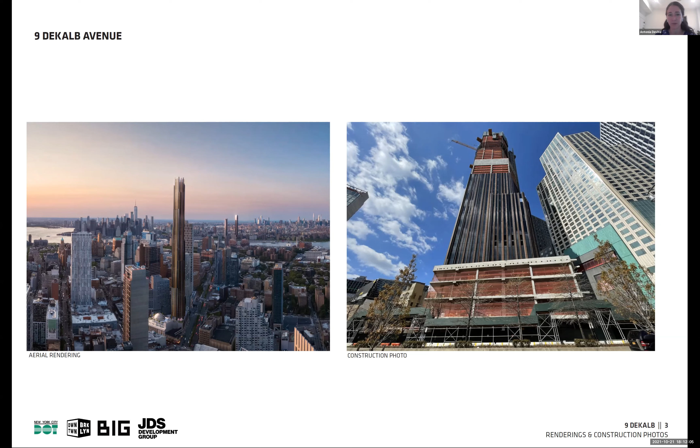And of course, I personally am equally thrilled that we are adjacent to the other Brooklyn landmark, the Junior's Cheesecake Factory. We pay particular attention with all of our projects to the ground plane, and we really admire the work that Downtown Brooklyn Partnership and Bjarke Ingels Group are doing to enhance the streetscape.

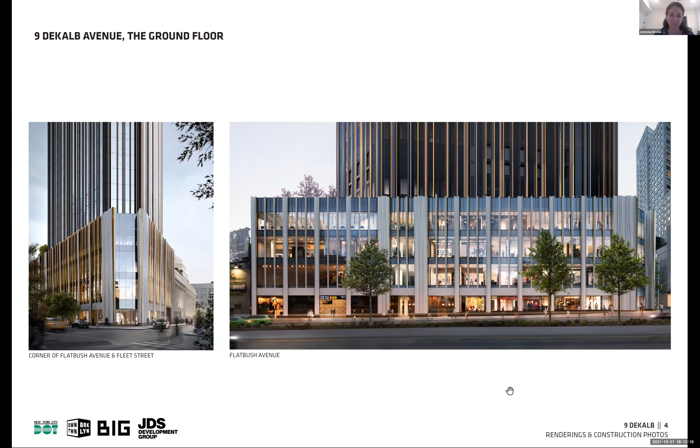So with that, I will turn it back over to you, Kate. Thank you. So we have, from our Downtown Brooklyn Vision Plan that was spearheaded by the Downtown Brooklyn Partnership, this project is one of the projects that's grown out of it.

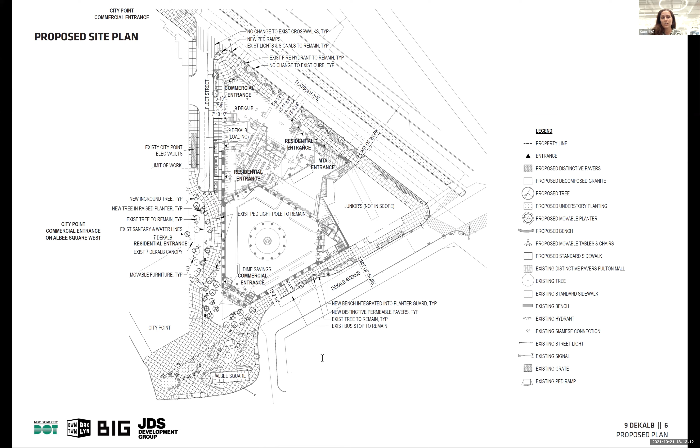And then this is our proposed plan. So we're trying to add additional seating spaces, additional activation and public spaces, building on the language of Albee Square, carrying that up Fleet Street, as well as providing as many additional street trees and as much additional green as possible. So just as an overview for the distinctive, I believe you saw this in 11 Hoyt last year.

So this is looking at the distinctive pavement. This is our approach: to use standard sidewalk pavement, and then where we really highlight, have a nice soft curvilinear geometry at the planters and permeable paving below to highlight that green.

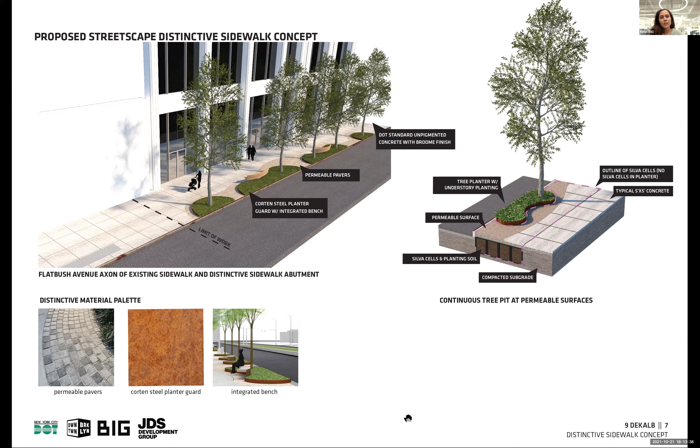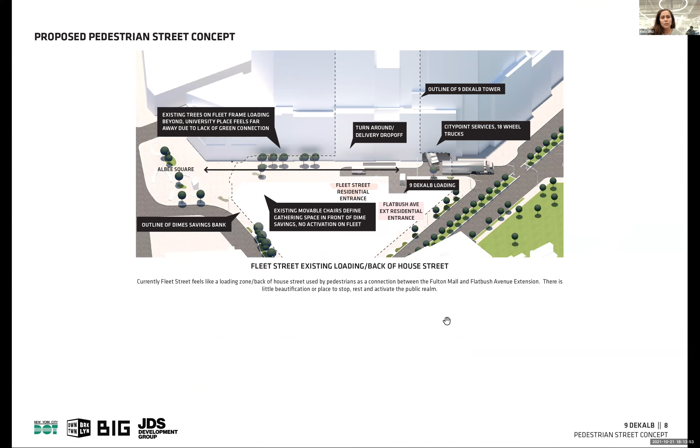And then on Fleet Street, existing, I'm sure you're all familiar, it feels like a back of house area with the City Point services, as well as 9 Dekalb loading will also be off of Fleet Street. So we really wanted to look at this area and study it.

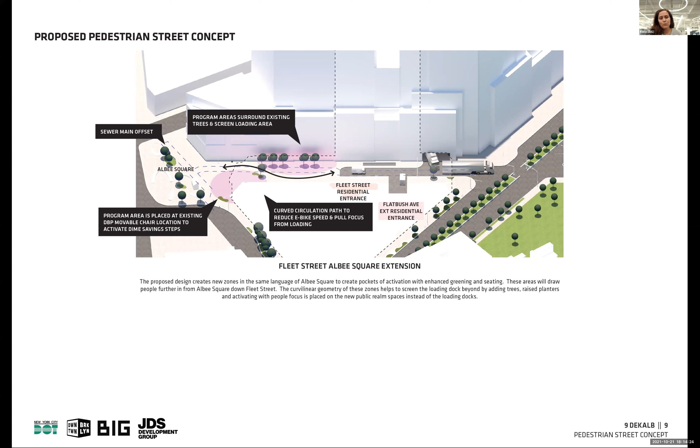So what our design is proposing is that we add additional program areas in a similar language as Albee Square, around where downtown Brooklyn already sets out the chairs in front of Dime Savings and also in front of 7 Dekalb, and to have this curvilinear pathway through it, one, to screen the loading beyond, and two, to create more program space and slow down all different types of transit in terms of bikers.

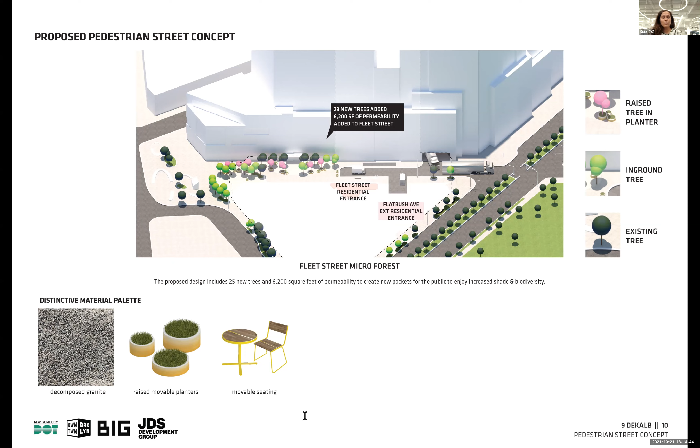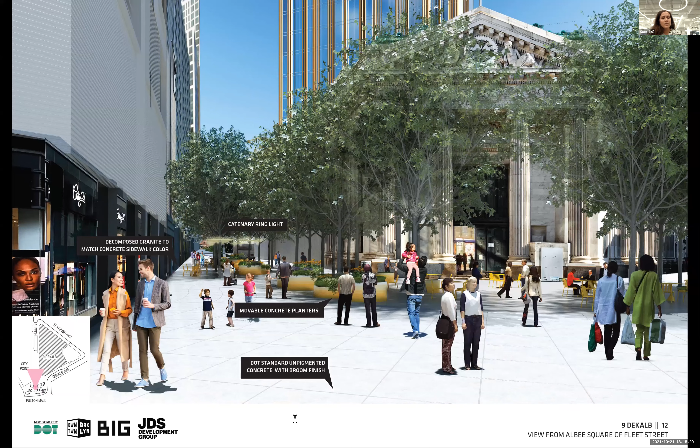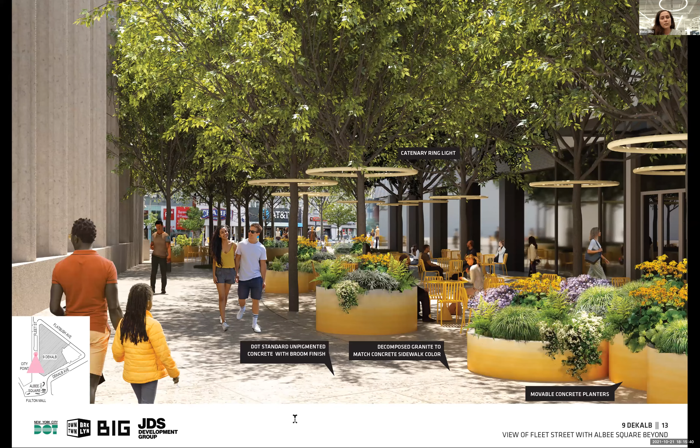And this is a view from Fleet Street with where the curb is behind us, looking back towards Albee Square. So really trying to add a lot of green, a lot of vegetation to this area, as well as a lot of activation through movable tables and chairs.

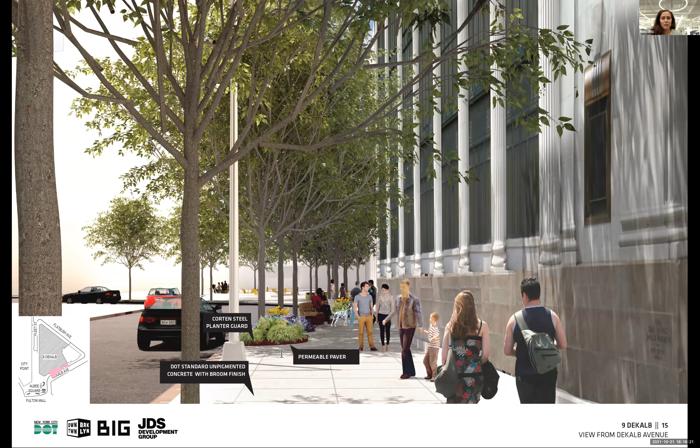This is a view from Dekalb Avenue looking towards Albee Square. So Juniors would be behind us, again trying to really enhance the amount of green throughout the project.

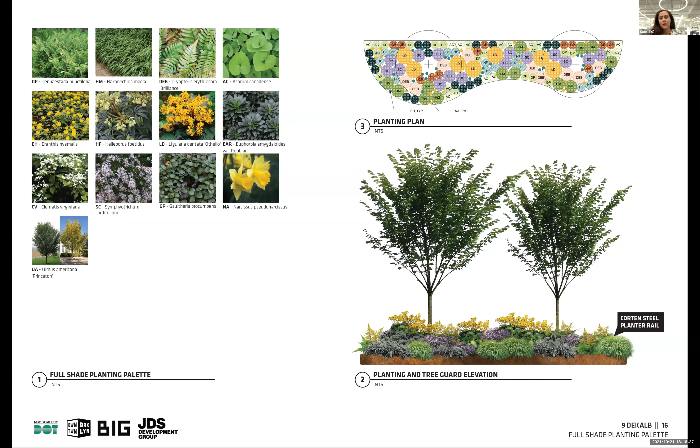And then just to give you a sense of the planting palette, this is the full shade planting palette, which is really on Fleet Street. So trying to have a nice seasonal interest, so there's always something there no matter the time of year.

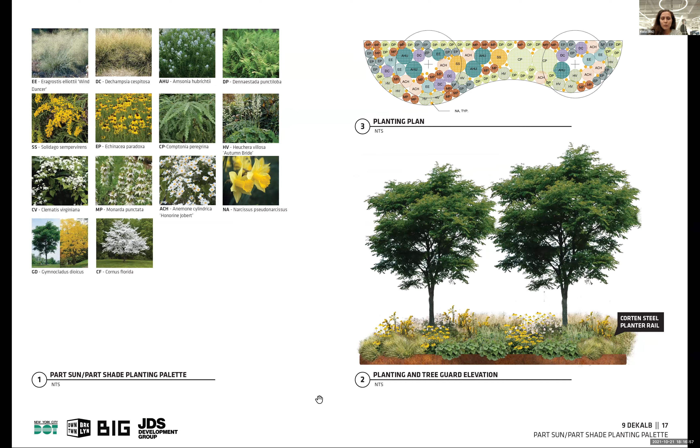And then this is the part sun, part shade planting, which is really in front of Dime Savings, as well as Dekalb and Flatbush Avenue. So again, these two palettes really complement each other and provide a lot of seasonal interest, is our hope. And I believe that's it.

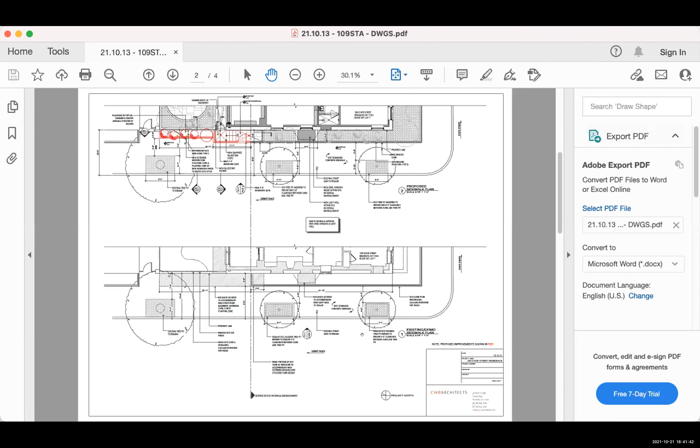Just to give you another overview of what this looks like in plan - we have the existing condition down below, where you can see this historical encroachment ends. In the plan on top, you can see the extension of the fence and the steps dashed in, going down to the rear yard.

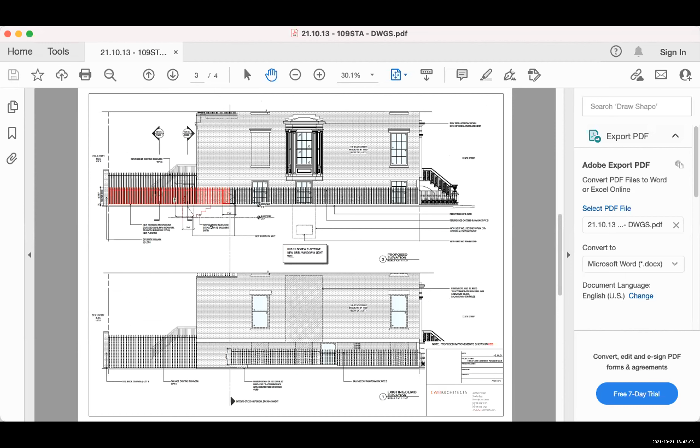And then here are just a few details of how that's working. And I think that's pretty much it.

So is the consent solely for the new work, or is it for everything that exists? It's solely for the new work. Okay, so basically it's solely for what you're seeing in red here. Because what's there already on the front on State and also around on Sidney is just grandfathered in? Yep. Okay, because there's scaffolding there now, these pictures are obviously pretty old. Yeah, there's a sidewalk bridge there already.

Yeah, we're doing an abatement on the roof. And you're gonna fix the fence that's already there? Because it's a bit of a mess. Yeah, we're going to refurbish it. Okay.

All right, so the application is actually limited only to that area in red, because everything else is already grandfathered and you don't need a consent for that? Nope. Or correct, not nope, you mean? Yeah, correct, it's correct. Okay. All right.

Thank you. Any members of the committee have any questions or comments on the application for the revocable consent? This is John Dew. Go ahead, John.

The work on the tree pits, the trees actually remain. The same issue that I asked for 9 Dekalb, is there any opportunity to create those under-tree bioswale type of contraptions that hold water?

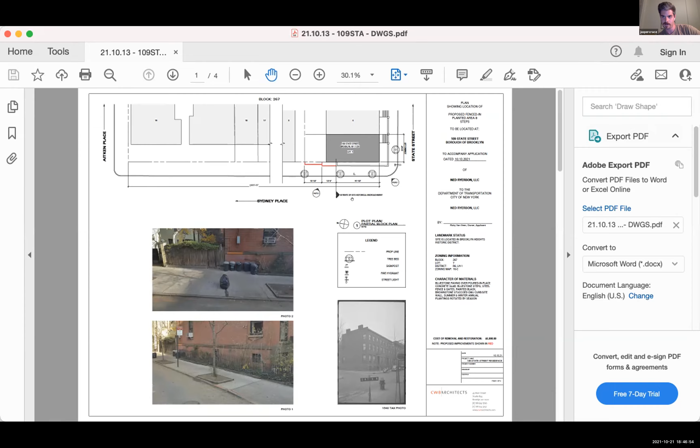Yeah, sorry, you were cutting out a little bit, but I think what you're saying is that they're single pieces of wood, and I'm wondering if rather than removing the perpendicular ones—not the interior, not the street facing ones—the beams can be cut down so that you can get the necessary clearance but still provide the deterrent to people that drive up onto the curb next to a tree.

We haven't considered that, but sorry, the connection is unstable. Can you guys hear me? Yeah, you were in and out, hear you now. Okay, I apologize, we hadn't considered that, but mainly what we were trying to achieve was what appears to be the typical existing condition for all of the tree pits on those streets anyway.

So yeah, I guess to answer your question, that had not been considered. Okay, thank you very much. Zero, you're muted.

To echo Brian's comment, am I correct that you will not have any kind of protection of the trees? They will all be gone, there won't be anything to protect them at all. No, it will essentially be concrete tying into the planting material. So the soil from the tree will just meet the sidewalk.